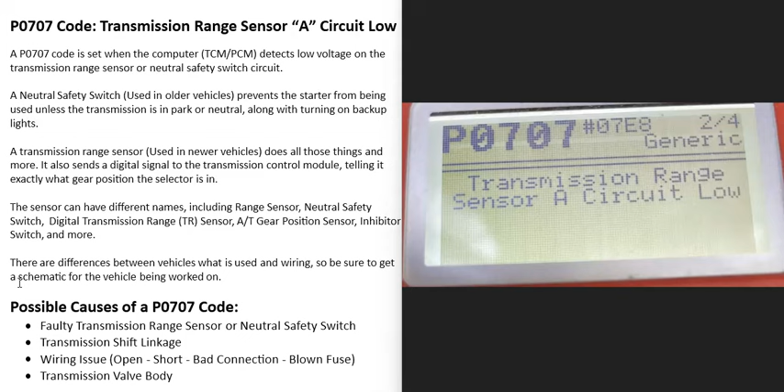So what is a P0707 code? Well, it's a transmission range sensor A circuit low. So what does this mean? Well, basically, this is what's called a transmission range sensor located on the transmission, and this sensor can go by different names.

In older vehicles, it was called the neutral safety switch, where basically it stopped the vehicle from starting unless the transmission was in park or neutral. In most newer vehicles, this is called a transmission range sensor. It can have different names, depending on the vehicle, year, make, model, manufacturer, things like this. In newer vehicles, it does all the things that the old neutral safety switch does.

But nowadays, these new sensors tell the transmission exactly what gear the transmission's in. And when you get this P0707 code, the computer's seeing some kind of problem with the circuit going to the sensor, in that the voltage is low for some reason. So it's going to need to be troubleshooted to know why.

So what would be some possible causes of a P0707 code? Well, the first thing that could cause this is that the transmission range sensor or neutral safety switch has just gone bad. It just needs to be replaced.

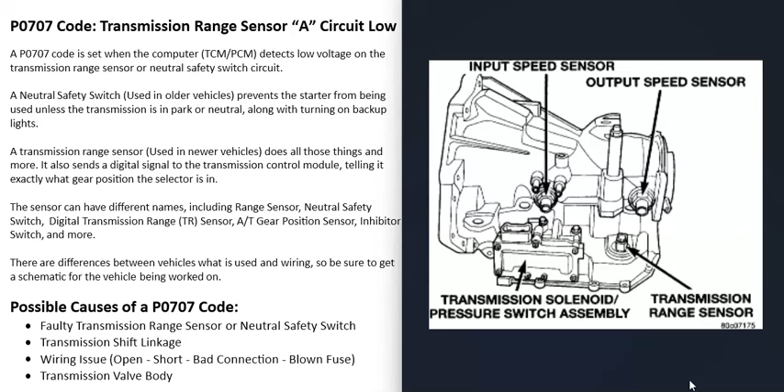So the first thing to do is locate where that sensor is located on your particular transmission, since there will be differences depending on the manufacturer, year, make, model, different things like that. They're usually located on the outside of the transmission, but sometimes it can be located on the inside. So it's really going to vary.

There's some different ways to go about testing these sensors to see if they have failed. There's some good YouTube videos on that. But the first thing that could cause this is a bad transmission range sensor.

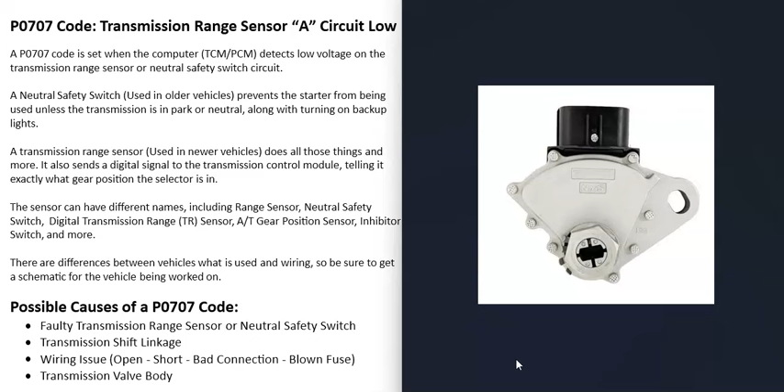And the next thing that could cause this is the linkage that goes to that sensor. Sometimes the linkage that goes to that sensor can become disconnected, like if a bolt came loose and came off or something like that.

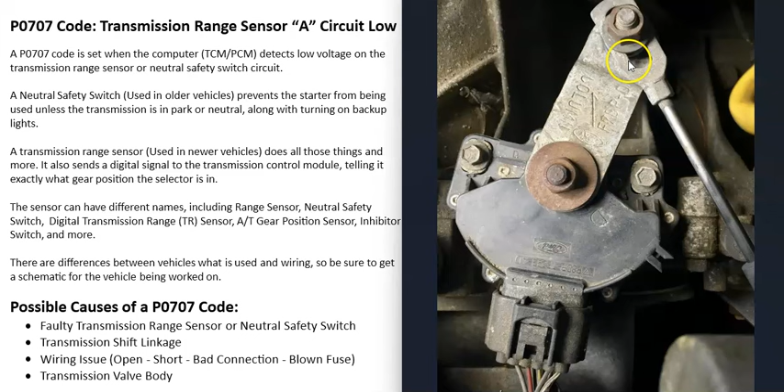Of course, this P0707 code is pointing more towards a circuit problem or some kind of wiring issue or bad sensor or something like that. But just keep in mind that transmission shift linkage can mess up these sensors, and it can cause them to have issues if they become loose or if it causes the sensor to become stuck in one position. So the next thing that could cause this is some kind of issue with the shift linkage.

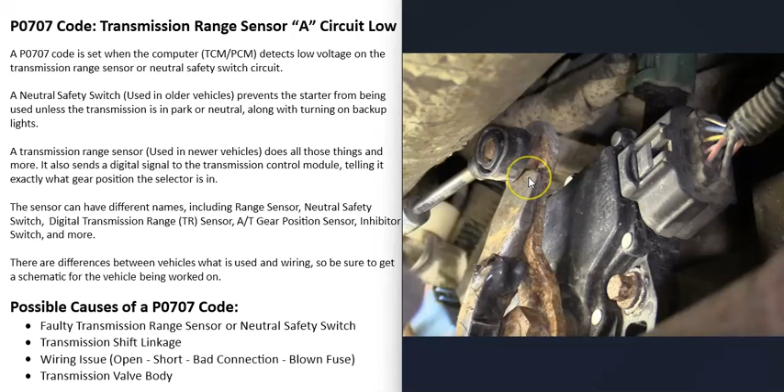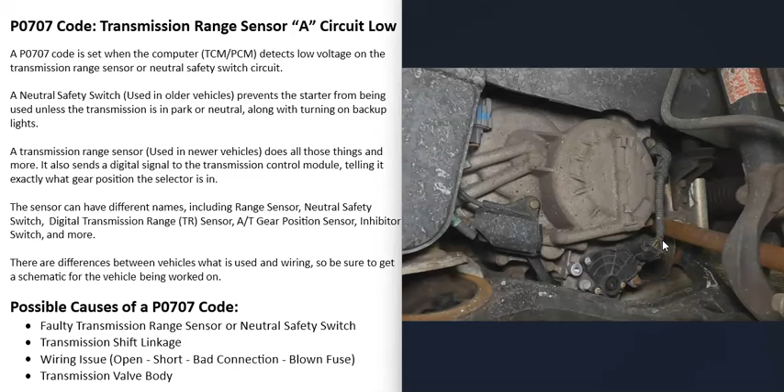And the next thing that could cause this is that there's some kind of problem with the wiring going to that sensor. Basically, if there's any kind of open, short, bad connection, anything like this, a blown fuse, then that's going to cause problems. So it can be a good idea to go check for any blown fuses.

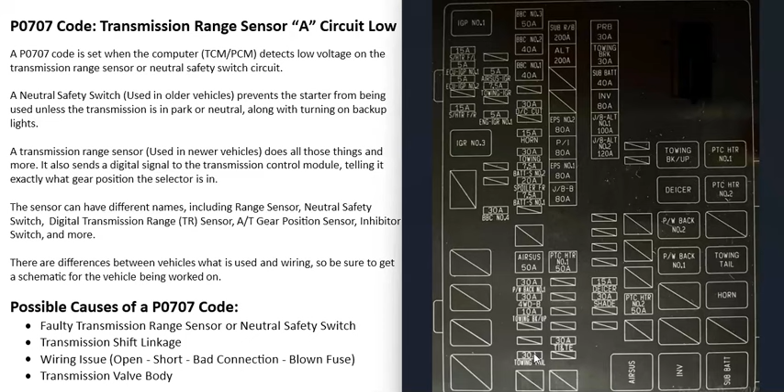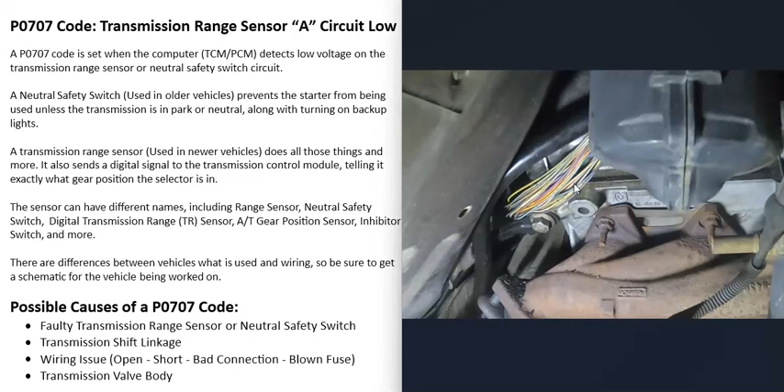Which fuse it is, again, is going to vary depending on the vehicle. So you will have to do a little research on your particular vehicle to know which fuse it's on. You can also get wiring schematics for your particular vehicle and go through and check those wires and be sure that there's no open or short or anything like this. Checking the wiring can be a little bit difficult to do sometimes.

But basically, if that sensor is good, the shift linkage is good and all that, then the next thing to do would be to get a wiring schematic for that particular vehicle and go check and be sure that there's no open or short or anything like this.

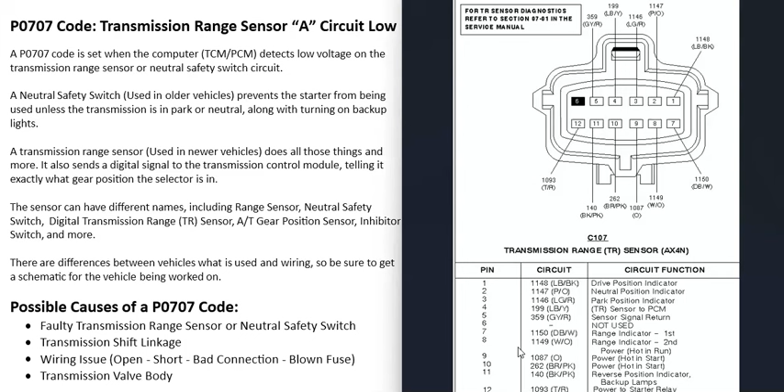And the last thing on the list is going to be that there's some kind of issue going on with the transmission valve body, or basically something going on internally inside of the transmission. Something's malfunctioned. This isn't going to be too common. Usually if there is some kind of problem with the valve body, then you'll be getting a lot of other codes, like transmission solenoid codes, transmission fluid pressure codes, or things along those lines.

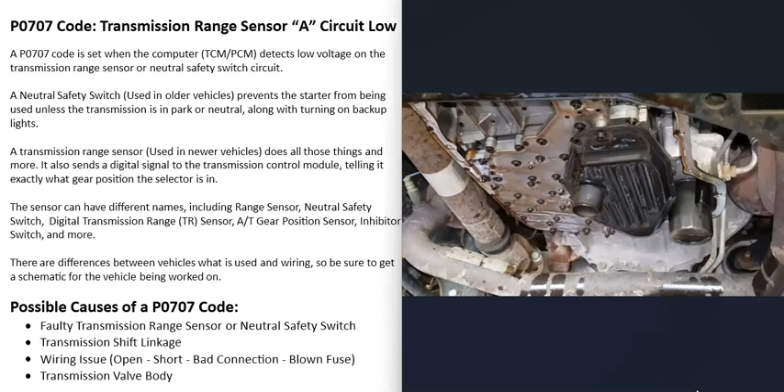But it is possible that there's some kind of issue going on with the transmission valve body that's just stopping that transmission range sensor from working the way it should. So the last thing on the list is going to be that there's some kind of issue going on with the transmission valve body. And so that's basically it.

I just wanted to give a basic overview of how you go about fixing a vehicle with the P0707 code.